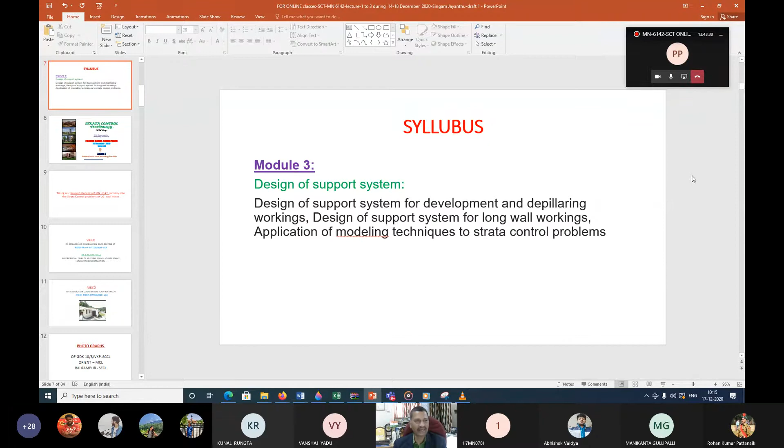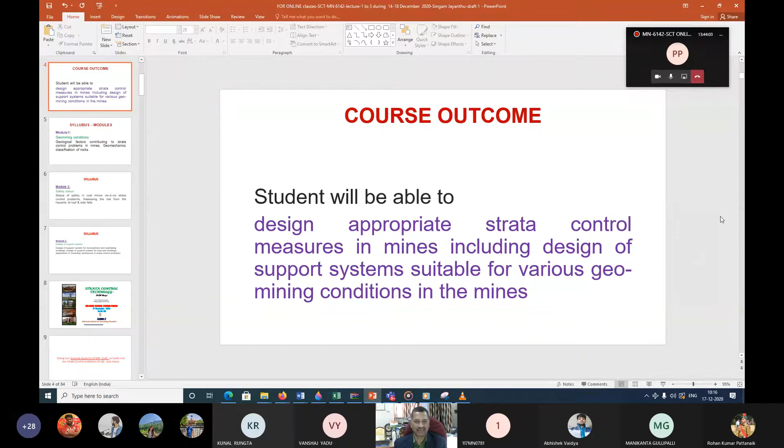Now continuing further, understanding about strata control problems and the syllabus. Already in the last class we tried to see what is there in the syllabus, part of the syllabus up to module 3 I think we discussed. Before going into other modules, I would like to show some of the present problems and why we created this syllabus, so we can appreciate it better, and we will try our best to make our knowledge, education and literacy useful to develop further and solve some of the problems, with an aim of this course outcome where you can design appropriate strata control measures in mines, including support systems suitable for various geomining conditions.

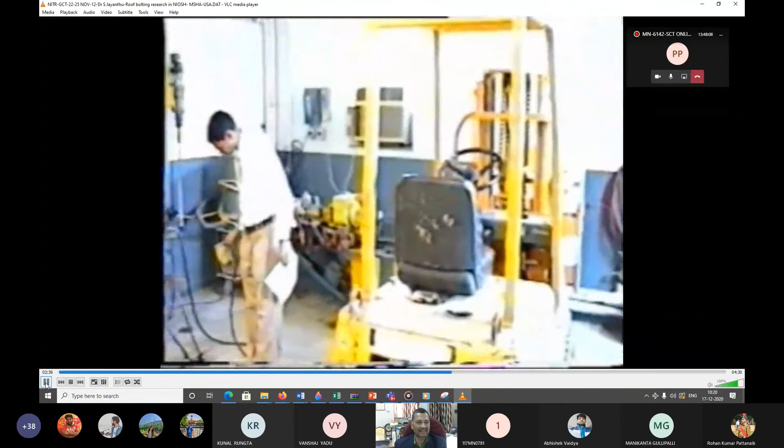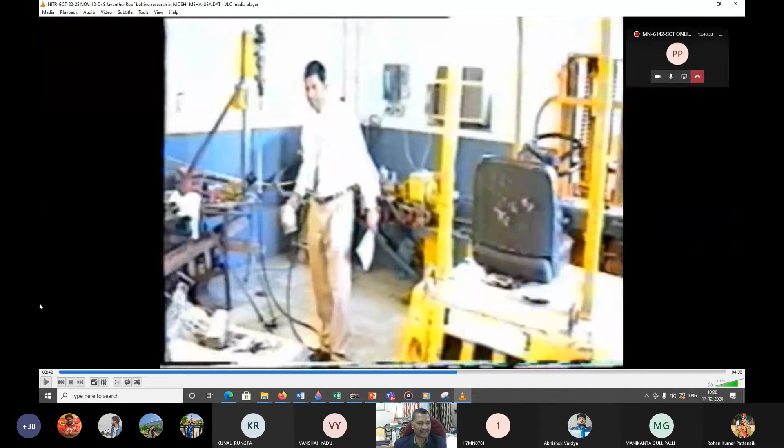No problem, sir. This is the Mine Safety and Health Administration Roof Control Department. As I already showed you, we are going inside the laboratory. What is the laboratory facility we have? At that time when I was there, I was with Ministry of Mines as a scientist. That was when we used to do research on combination roof bolts, mixing both quick setting and slow setting, to see what will happen. This was in 1998 when there was an international conference on ground control. This is more relevant, that's why I'm showing.

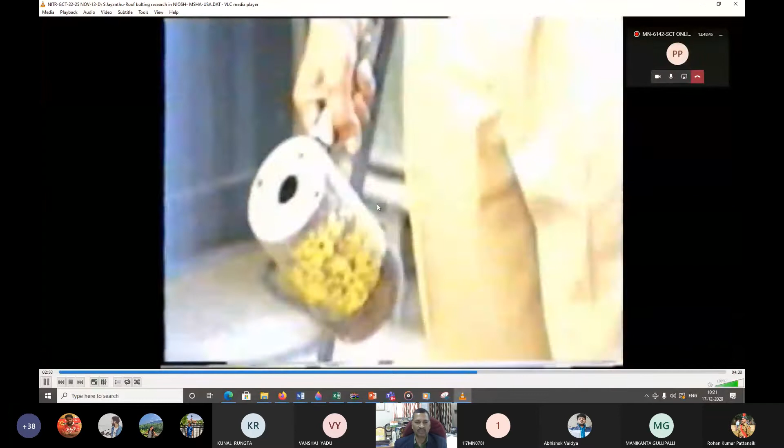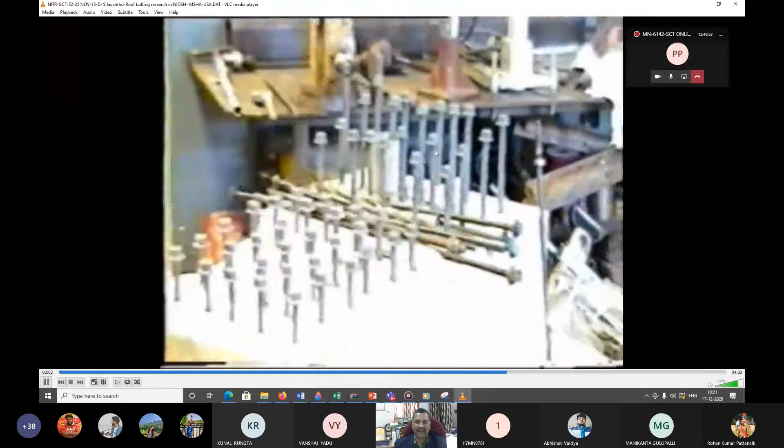This is the equipment for testing, which we were not using before. We were using a bigger size, requiring 3 persons for testing. The same day I made a call to the directors at Singareni and we tried to import and utilize that technology with only a single person, at most 1 person needed. That was in 19...

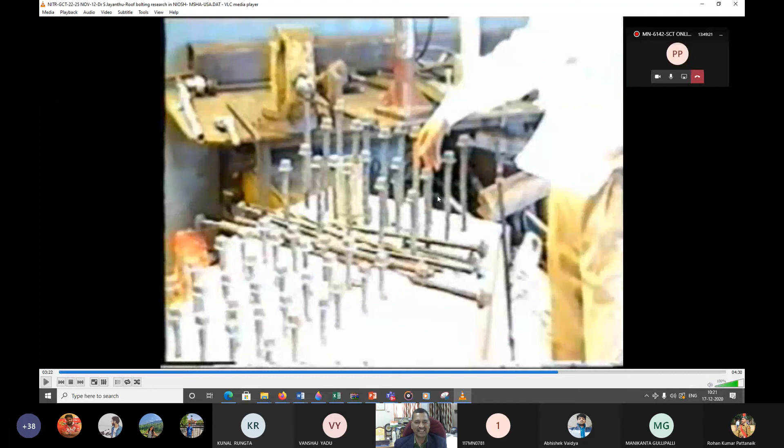And they have different bolts. Now I think you are able to see these bolts. This is not just a bolt, but a combination bolt when we use it along with quick setting and slow setting, where one part is cement and another part is some resin - then what will be the performance? You can see this very big block of sandstone here, taken from the mines, and they are testing it here. You can see their testing facilities.

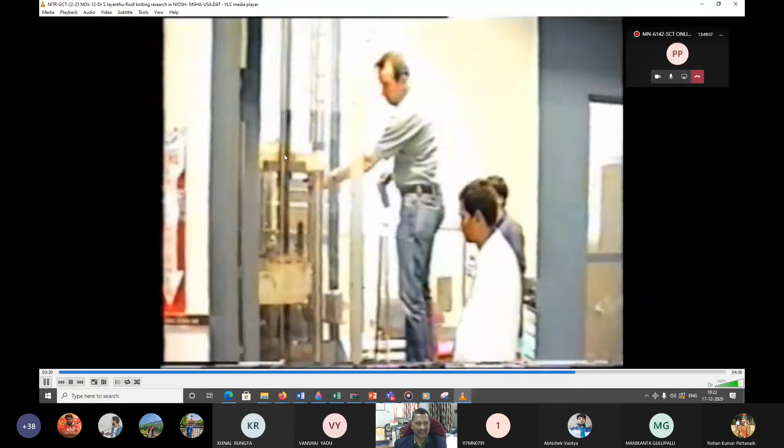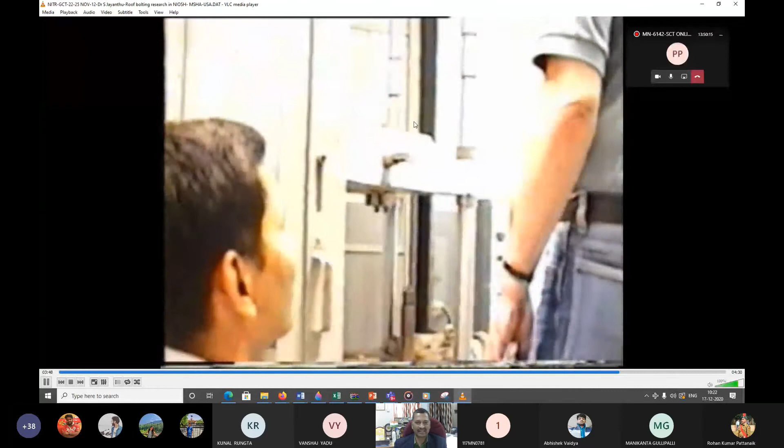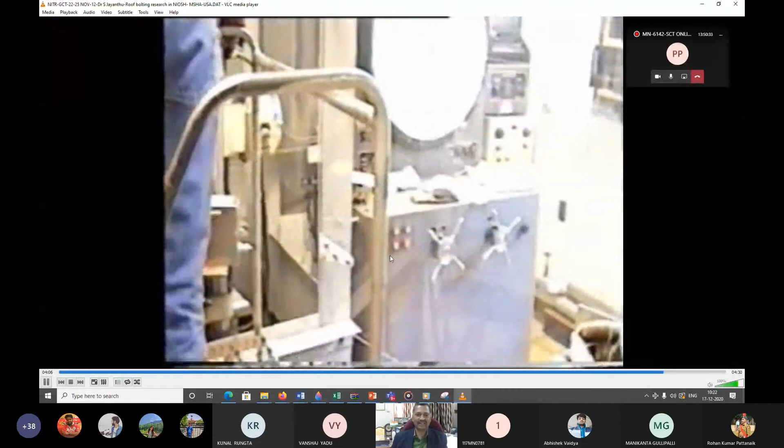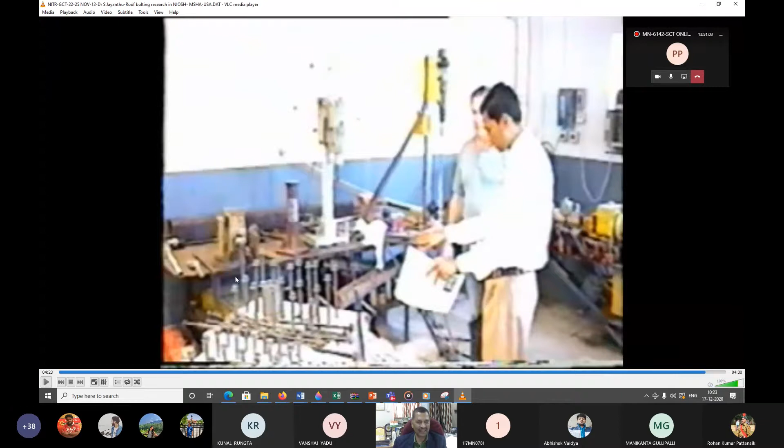What research is being done - this is not sufficient just to do it ourselves. The research, but it's not the research done all the time. This type of research and academics flowing through our next generations is very much important, with a sense that at least we should save - I used to tell you - one life with our research, knowledge, literacy, and minds.

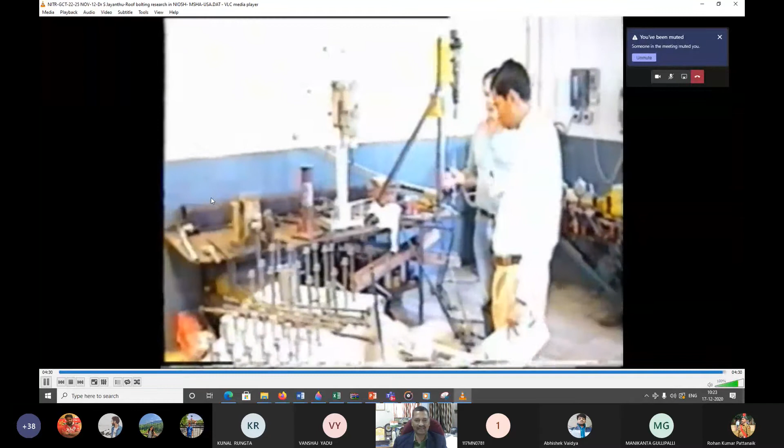Sir, your voice is not audible. You're on mute. Now, are you able to hear my voice? Hello, sir, you are not. Yes, sir, yes, very good.

So the problem here is when we go to full screen, I think there is a problem. Now continuing without going to full screen, let me show you and bring some more, and then explain why we created this course and what are the contents in the course, what is expected from you to learn and contribute to the next generations, improving strata control measures.

Here also I would like to take you inside some of the mines, but not taking so much time. Before starting any course, you should first understand why this course is required, what is expected, and how it is going to be useful for the society, or especially for the mining industries.

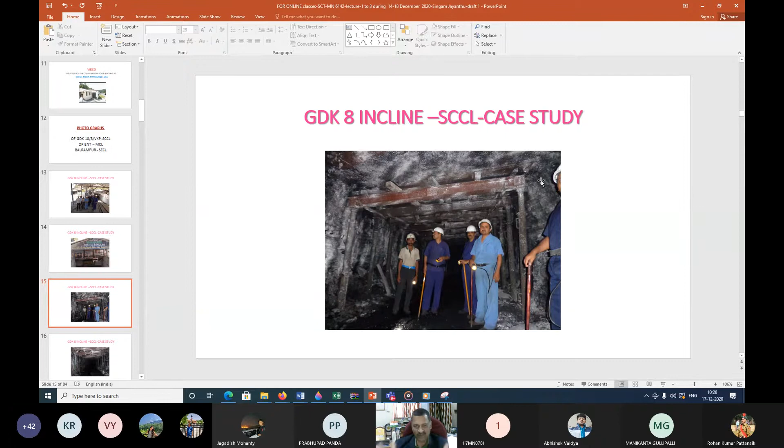So when a person's height is around 1.5 to 1.6 meters, this working is around 2.5 to 3 meters in height. These are different types of supports. But how this support was formulated, how it is designed, and the scientific basis behind it, all these things we will now concentrate on as a strata control engineer. See it with that perspective.

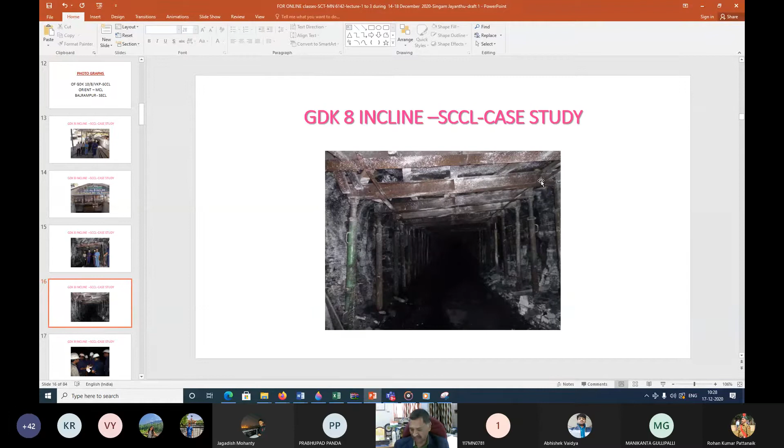Now, my beloved students, here is a roadway perfectly supported, I can say. I have seen this type of thing in more than 50 mines in India, from north, south, east, west. Many designs are required to be modified in consultation with people and observations in the mines, and that's what is required. It is not just limiting ourselves to any book, but learning from experience and from nature, Mother Earth, and then responding.

And that is where ground behavior and support behavior come in. We should match, we should be compatible.

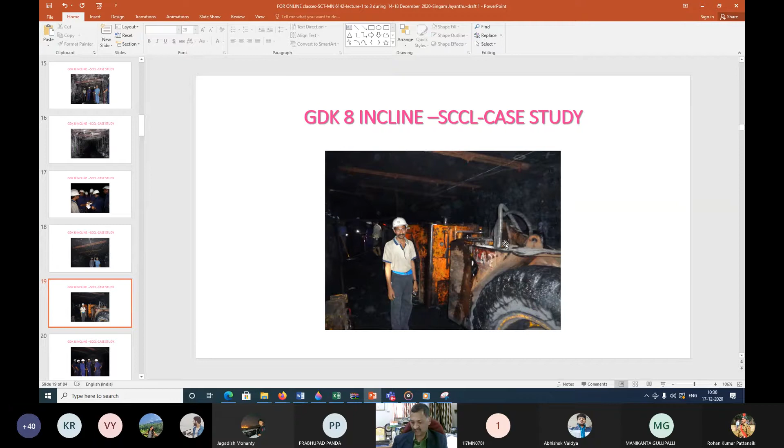That's the reason why, in the morning, I was talking to one of the senior-most industry officials. I said more important than mine and money is the life of the miner. So that is our prime aim, and that is the reason why we are studying this course, my beloved students.

Now you can see different places in the mine, in that mine, with sides, somewhere it is strong, somewhere spalling, and the roof. This is a junction, how it is supported with a W strap, all these things you can see here.

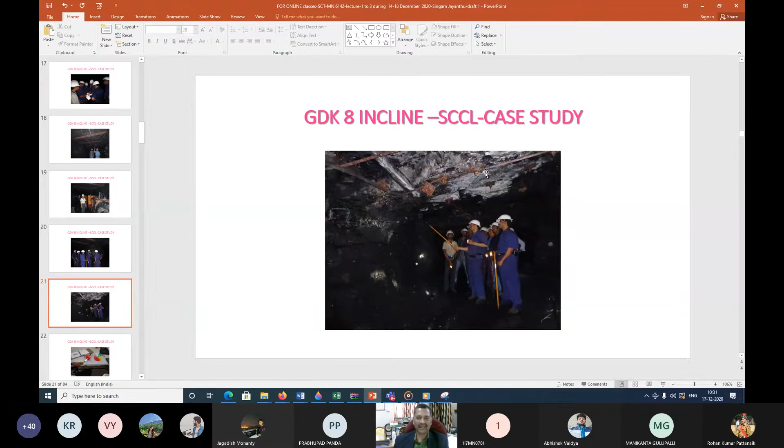There may be a requirement of additional supports beyond what was designed, which may be required as part of our SCMP, Strata Control and Monitoring Plan, as per our Coal Mines Regulations 2017. Otherwise, it was called the Systematic Support Rules of 108 of 1957, which is known to all my beloved students and scholars of this class.

Now, going further, to know as an engineer, it is not just to understand how good or bad it is, but you should be in a position to quantify. Not only quantify it, but also to visualize and indicate. That is possible by some type of ground control instrumentation.

I hope some of my beloved students will also be taking up this lab course. I may not be able to show you all these personally or visually in the regular class, but some of our beloved technical assistants and our technical officer, with congratulations to our Malik Babu who has become technical officer, he has a better vision. He will make a very good videograph of this, and we will be showing you in your virtual or online class tomorrow as part of our ground control instrumentation laboratory.

But here, for the purpose of theory, we should be in a position to quantify how much is the bed separation. I am not going into details of the instrument at present, we will be discussing it in subsequent classes.

And this is a telltale instrument which shows red color, yellow color, green color, white color, right? So this is something like a traffic light.

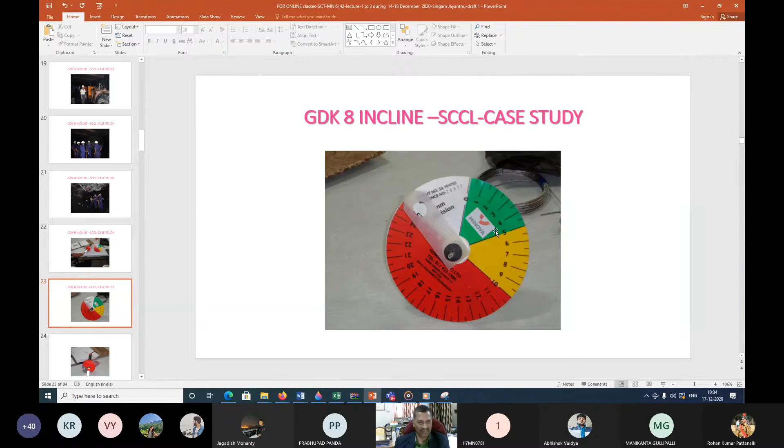Now this is a close view of an automatic auto warning telltale, where there is an indication which can be shown as a red light when it exceeds a limit, which can be set by us.

In general, you may note down somewhere: with my very limited experience of around 3.5 decades working over so many projects, I can say more than 20-25 millimeter should be considered as a dangerous limit in our Indian coal measure strata. You note down somewhere.

Here, the step further for a longwall mining, that was a blasting gallery panel, and this is a longwall mining where we can see some of our beloved students who visited along with me in some of the mines. He is our Sridhar, who is a supreme king, the total area strata control engineer.

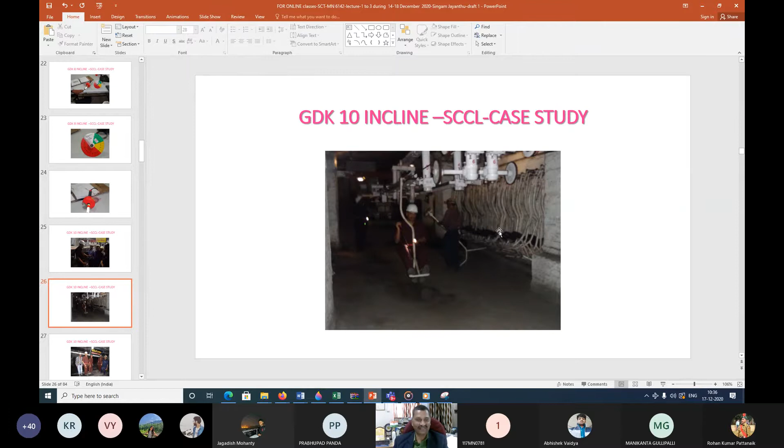And now you are entering inside, my beloved students, in the long wall panel. Then you feel that you are sitting just beside me, but it should not be just like our Corona, whether it is before Corona or after Corona. There should be some distance of 15 meters from one chair to other chair - this is the chairlift system. We are entering inside. You feel that you are with me, right?

Now let us go further. Now, long wall panel number 3D1, right? And this is my transdisciplinary group of electronics, computer science, instrumentation engineers from different institutions, along with of course our Sridhar, who is king of strata control from R&D department, working with me at that time.

Now, when we talk about any mine entering inside, you should know, of course, I am not showing you the plans at present. Later, of course, we will go through that.

And to explain and give importance to this course, why it is supposed to be learned - for anybody in India who is learning mining engineering, I wish that you should be one of the best strata control engineers from this subject, if not in India, in the world. You should become the best.

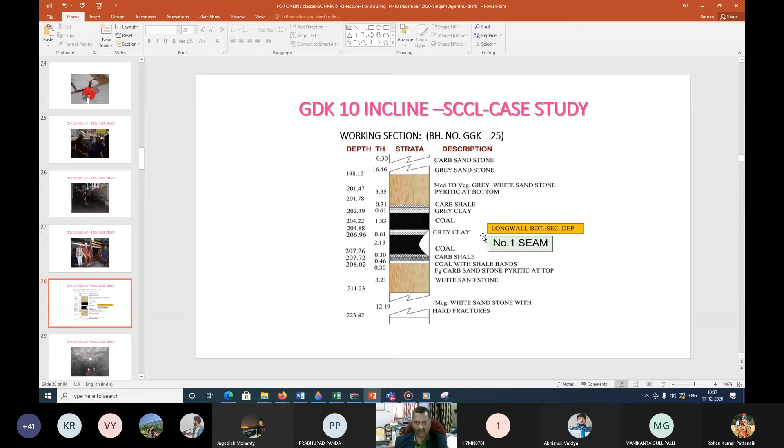Here, GDK 10 incline, this is the seam, which is number 1 seam, and before whatever we have seen, that was GDK 8, that is number 3 seam blasting gallery, but this is a long wall. Along the floor, we were working like this with clay and so many things, right?

Now, going further, when you are entering through, along with me, strata control engineer, that super king of R&D department, Sridhar here, right? So now we are more interested with the requirements of the support systems, how we design and what are the requirements, where it may fail.

Now you see these are the supports with wire netting, then your, what is this called? Anybody can respond, my beloved students, I am showing here. What is this support? At least one person can unmute and tell me. Mesh support, sir. Very nice.

Along with mesh, what is there? This support, what is it called? This is one, something like a bar. You are able to see here, I am moving this cursor - next time I will make the cursor big. Okay, no problem. These are the W straps, right? Okay.

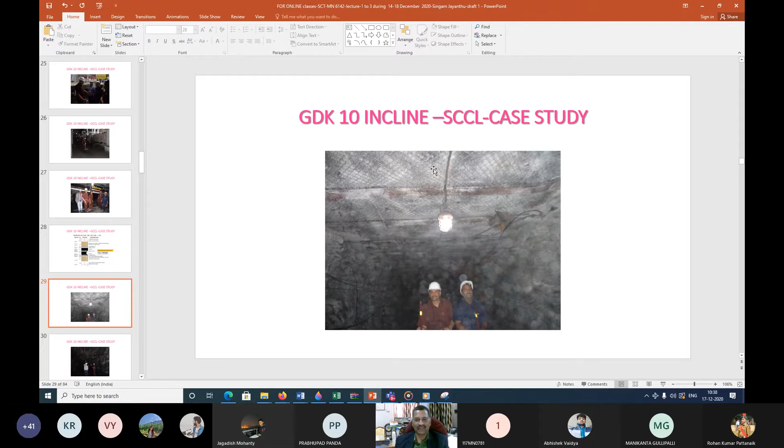Sometimes it may be required to reinforce with W straps or wire netting, but you cannot use all these at all places since it is very costly. Now there may be some places that are fall to place, bad roof conditions, so we entered inside, cleaned, dressed, and then re-supported. You can see the difference here, which was with crossbars and later extended further with bolts, maybe cable bolts. So many things are required sometimes, including roof stitching and lagging set against the roof and sides.

We are going a little bit more further inside the mines. So inside that mine, now you can see, come here, our Madan is also here. You sit here, Madan, come here and along with me you sit, because you have to show all these things to our students, all our students along with our very senior executive PhD scholars are also watching this. You sit here, come here. You should make your knowledge useful for them.

Understand, these are the instrumentation required for our ground control instrumentation. And this is telltales. We have some of the telltales with us, and we will start today making a videograph of that class by our Madan and Malik Babu. Already I told you, my beloved students, for tomorrow, but today we will make it, so that these instruments definitely you will be understanding, as part of our course to understand strata control technology.

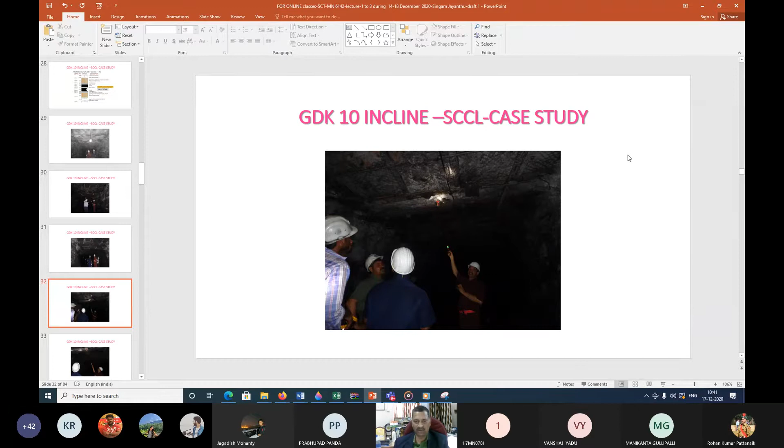As an engineering student, not like a layman, just telling that this roof is good or bad is not sufficient as a literate, educated person. We have to measure, we have to write: yes, this is having a bed separation of 2 millimeters.

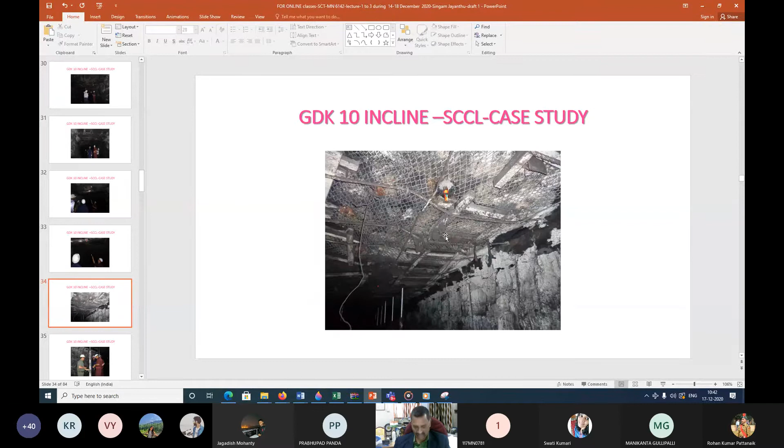And here we have wire net mesh, which is very clear, but for my beloved students I can make it even more clearer. You can see this is a wire netting. In addition to the wire netting, whatever you have seen before, that was with W straps, but here the W strap may not work. But how are you deciding that?

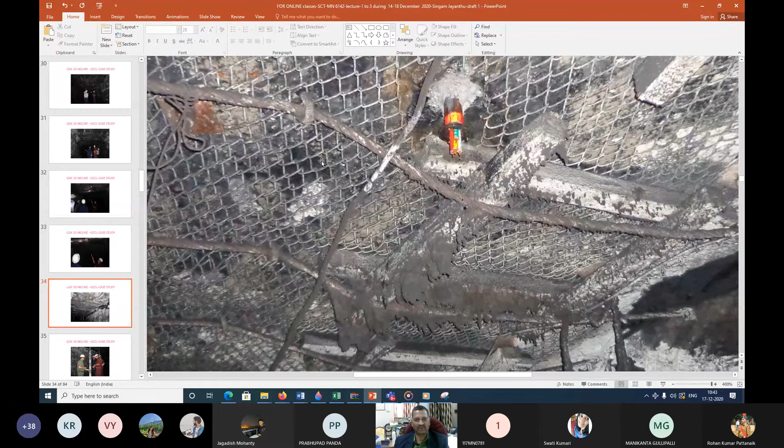That is based on your knowledge, what you learned, and your observations in the mines, and whatever were experiences of previous generations from India or elsewhere. Already I have shown you the leading institutions in the world, including Mine Safety and Health Administration, Pittsburgh and Spokane institutions, including National Institute for Occupational Safety and Health. That video also already you have seen.

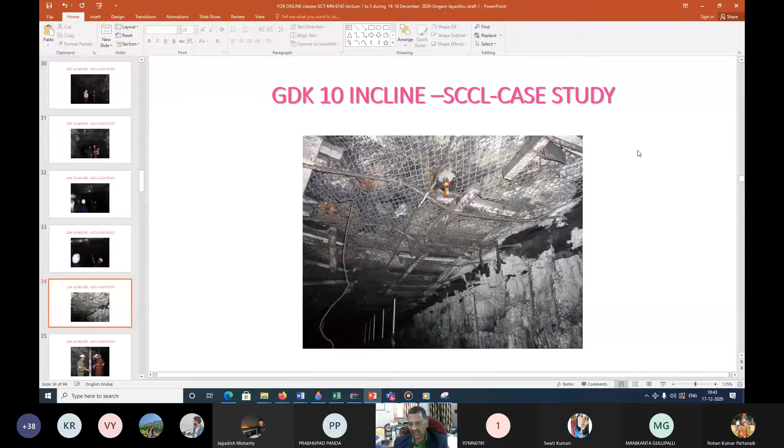So now you are entering a little more along with me inside the mine, my beloved students. Whenever you feel, after 30 minutes again I will be taking you for your questions. You can also write your queries.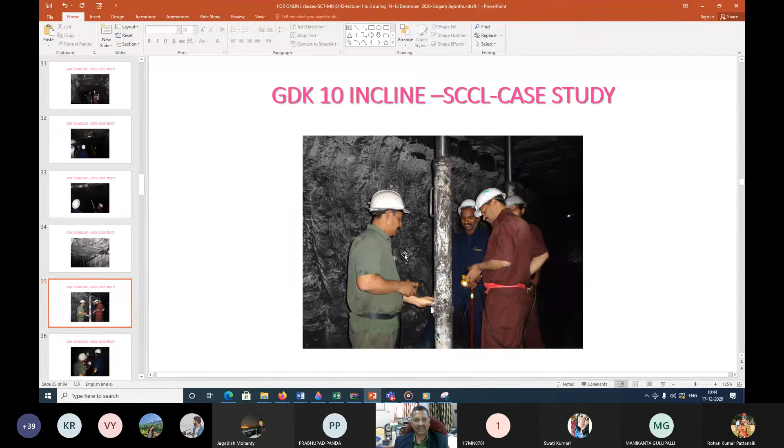Now you can see how these sites are, how this roof is here, completely better. And now going further, what are we doing here? Here we are measuring how much load is coming on that, and these are the different types of instrumentation. At that time, I may not be showing again and again.

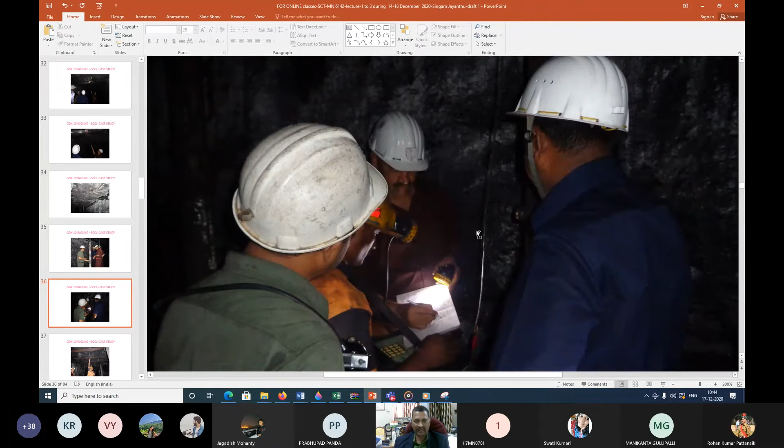So for my beloved students, Nitesh, Swati, and others, you note down in some white paper, your notebook, that these are the typical instrumentation, whether it is a convergence, whether it is load cells, whether it is telltales, extensometers. When I, along with our Madan and Malik Babu, explain these, you should get ideas of where each is being used, then you can appreciate better. These are the readouts we will also show you at that time. Now we are going further, now you see how it is being measured.

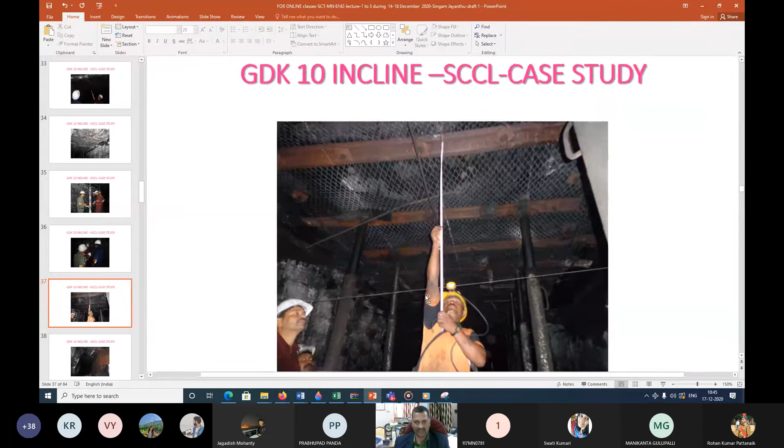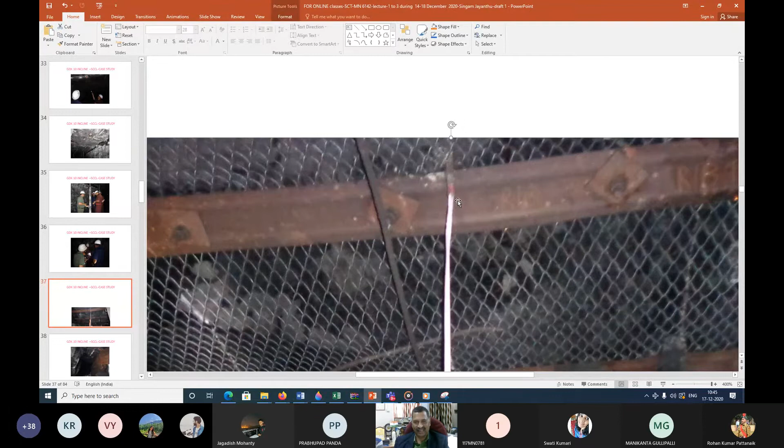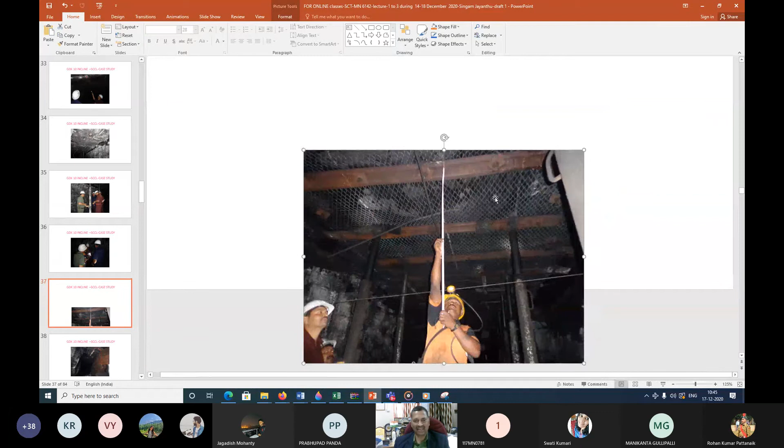Here, simple convergence is being measured by different means, but this is not convergence. When you closely observe, there is a 6-inch rod installed in the roof, and it is being measured. There is one horizontal wire, fixed horizontal using a water tube level. So we are measuring the roof sag here, not convergence. There are so many ways to observe and measure.

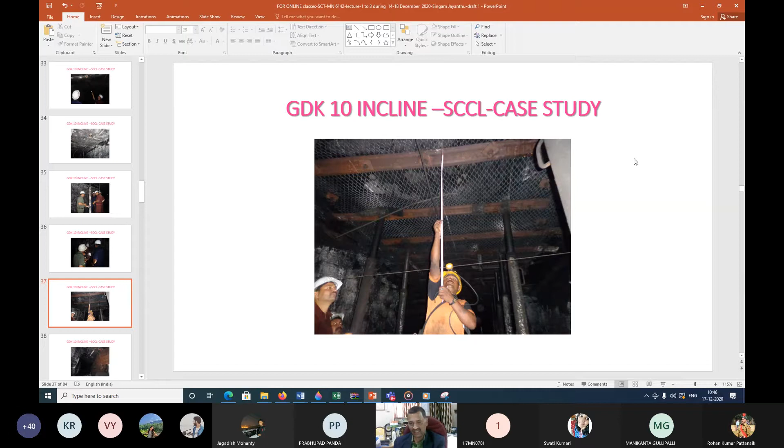Going a little further, we will be discussing all these instruments. That's why our Topi Wala is here with a mask, a beautiful mask. He will be showing all these instruments and explaining, showing his beautiful face. But at that time, see only the instrument, not the beautiful face, as I told you already.

Nobody can enter inside. That is where my students, my scholars should enter and do something for the world, for India, for the mining industries. Nobody could dare enter and study those areas to save the lives of persons, to improve the stability conditions. As a strata control engineer, I wish you people can do that.

Now this is what you should understand. So what is the roof sag? What is the convergence happening? How much load, how much stress is coming on these pillars? And what is the separation?

If there is a separation of 10 millimeters, then we must know whether that separation is occurring near the roof level, say within 50 centimeters, or whether it takes place after 3-4 layers, perhaps from 1 meter or 2 meters above. So these things we should understand - where exactly this separation is taking place.

And depending on that only you will be designing the supports. Otherwise, whatever rock mass rating, equations, modeling you use, all goes to the dustbin unless you understand this. With my limited experience of 3.5 decades helping design so many systems, including formulation of Indian mining law, I can assure you that you will become the best if you show interest to learn more on this.

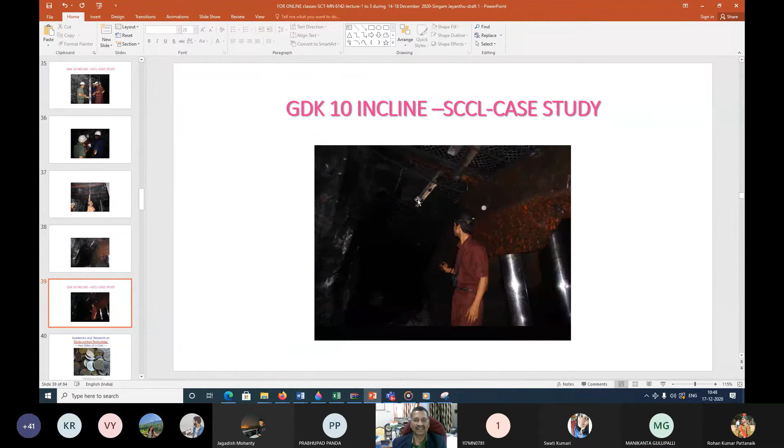Now you see, this is the different type of supports near the goaf edge. And here I would like to give you more, but before telling something else, I would like to have your queries.

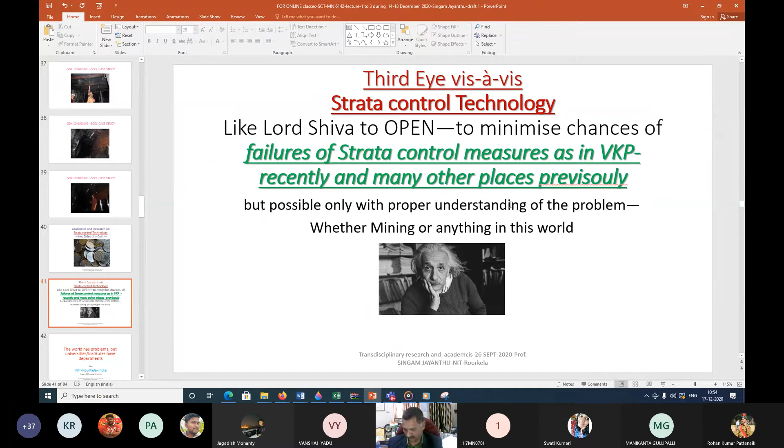And even Einstein is looking at you, my beloved students. Take that. If that is the case, the world has so many problems, but our universities, institutes, and especially our NIT Rourkela...

Sir, your voice is not audible. Are you able to hear my voice now?

Yes sir, very nice. So for that, you should look deep into nature, and you will understand everything better only when you understand the problem.

This is not only told by Albert Einstein, his forefather also must have told him, but he has not mentioned it. Don't worry, my forefather also used to tell about this.

The only source of knowledge is experience, and for that experience you should have patience and interest to understand, not as a lazy person just to earn money, but to contribute something. That should be the aim of our education. I wish my strata control engineers learning in this class will become some of the best strata control engineers in India, if not in the world, with all this knowledge.

Education is what remains after one has forgotten what one has learned in schools. It can be schools or institutions, but you have to learn from yesterday, live today, and hope for tomorrow. And the important thing is not to stop questioning.

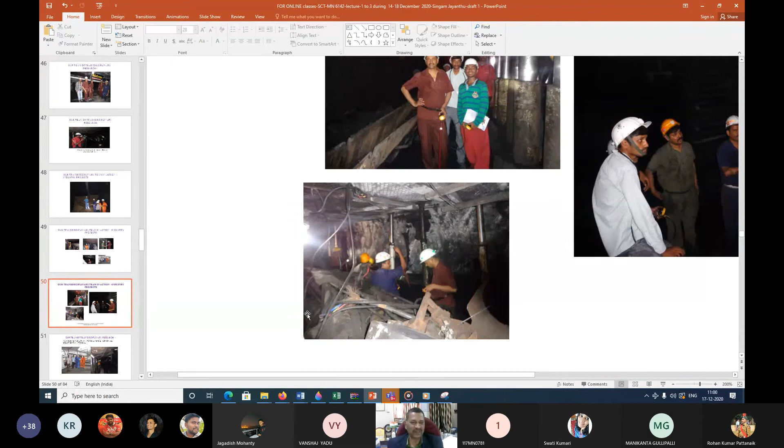Right, so now you see, these are some of the typical issues of strata control sites, how it appears. This is again equipment which may restrict you to adopt certain technologies - you cannot use the same technology in the same mine, or even in different places in the same mine. So this is all site specific, how it appears, you can see here.

Now going further, I am taking you a little bit more inside the face. You can see the long wall shield support, about which I already explained in your previous classes in our material handling laboratory along with our Brahma, who is our laboratory in charge of material handling. I have shown you how this long wall panel everything works, but now I am taking you with me.

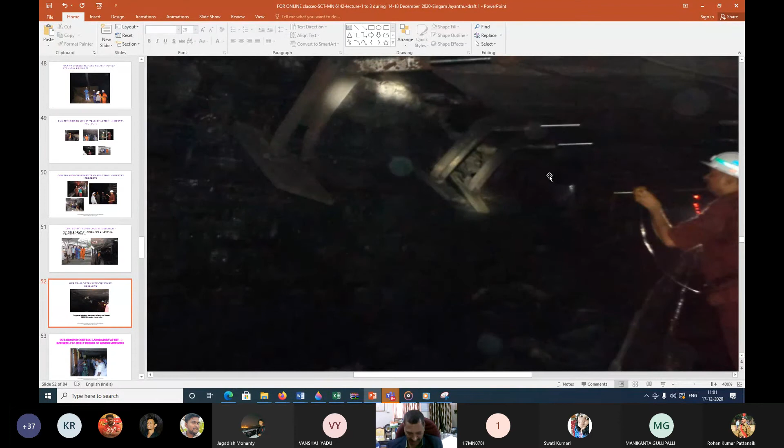So supports including that - this is also part of the later Adriyala project. For all this, since I could not get our Madan, I could not get our Malik Babu - he has grown old so we don't trouble him too much, he must be busy with so many works - that's why I am showing his photograph.

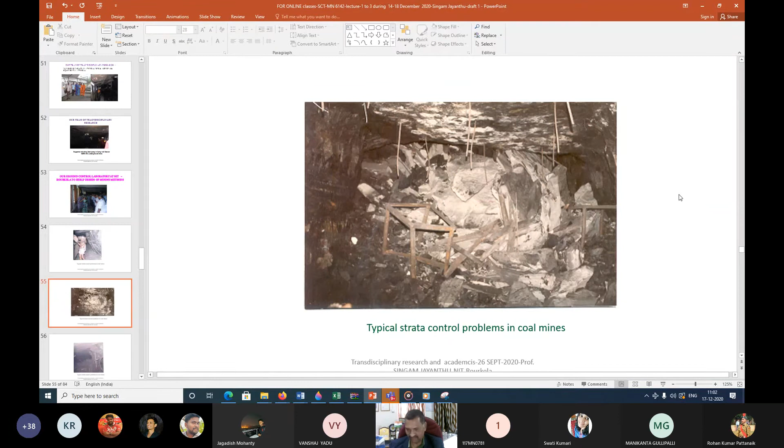Now you see what are the typical situations in the mines. Are you satisfied with this type of situation, my beloved students? Definitely you will say no. Now we have to design strata control for this. And whenever you are designing, this may happen sometimes. You should be prepared for this. This also may happen, even a floor heave can happen like this in very typical situations where there may be clay and other things, and you should be prepared for it.

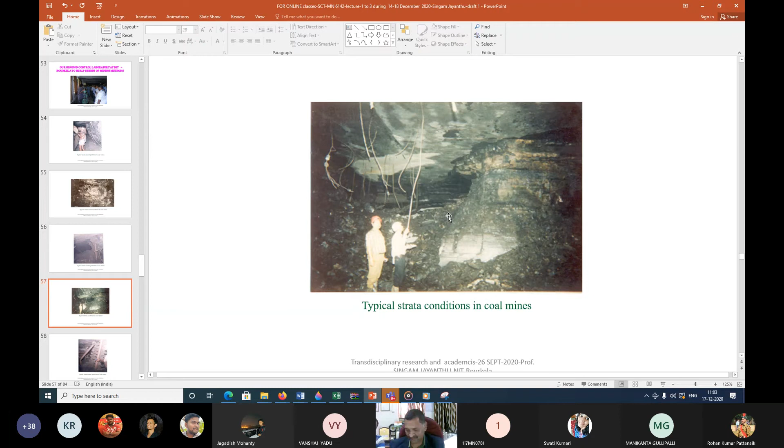This is something from long back in 1989 when I was a scientist. At that time, I used to be there in 3-4 shifts underground just to understand when stress is 2 kg per centimeter square, what is happening to the roof, when separation is 5 millimeter, what is happening to the side. This is what I wish my students, my next generation, to carry forward and design strata control techniques, which should be adopted by other countries later, whether it is Australia, US, whatever it is.

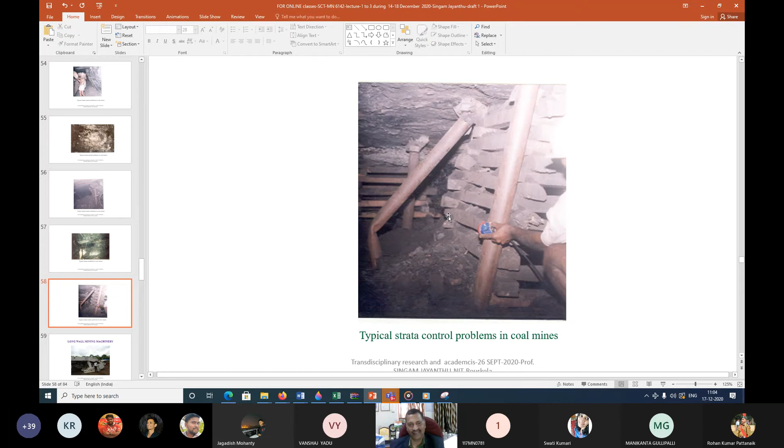Now you may design so many things, but you may be wrong sometimes. I already told you, I don't believe much in numerical models and testing in the laboratories. I take less than 5% of that, and we take more about the practical situations in any design.